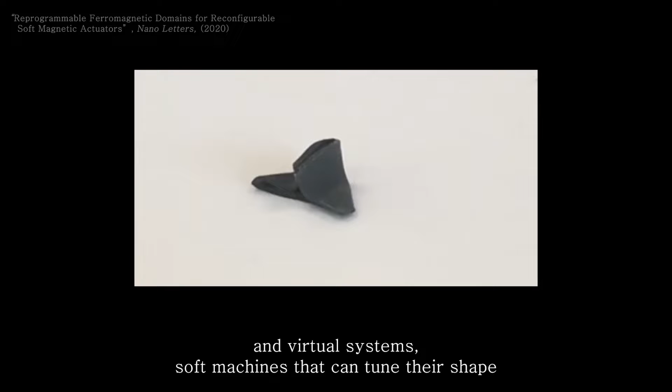Inspired by these remarkable adaptive features exhibited by biological and virtual systems, soft machines that can tune their shape and mechanical properties have shown great potential in applications involving unstructured and continuously changing environments. However, current soft machines are far from achieving the same level of adaptability as their biological or virtual counterparts, hampered by limited real-time programmability and severely deficient reprogrammable space of properties and functionalities.

To address this challenge, here we introduce a pixelated in situ programmable mechanical metamaterial, PPMM, that leverages graphical stiffness patterns to program and reprogram an unprecedented level of versatile mechanical capabilities without requiring additional infrastructure.

Inspired by binary language systems, where simple coding of discrete binary digits with assigned coding sequences enables effective and comprehensible representations of a variety of information, we harness stiffness tunable pixels that can be in situ encoded as 0 and 1, where 0 represents the pixel in a stiff, deactivated state, and 1 represents the pixel in a soft, activated state.

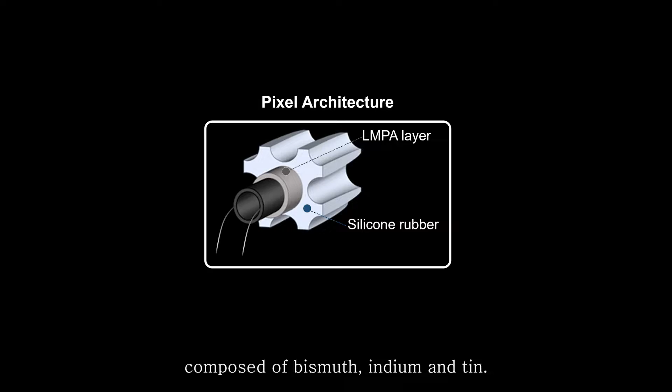To achieve this, we employ a synergistic approach that combines the elastic instability of an elastomer with a periodic array of circular voids and the phase change of embedded low melting point alloy, LMPA. The LMPA we used, known as Field's metal, is a eutectic alloy composed of bismuth, indium, and tin. This alloy remains in a solid state at room temperature, but undergoes a phase transition into a liquid state at a low temperature of 61 degrees Celsius.

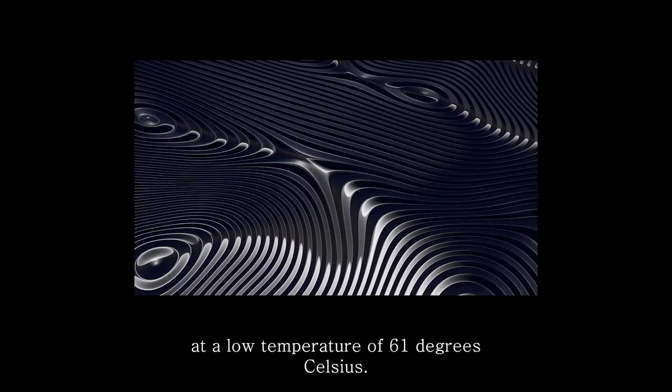This unique property empowers each pixel of the PPMM to achieve dramatic changes in stiffness with low energy consumption. Finally, we integrate soft heaters into each pixel to enable real-time active control of the LMPA and ensure reversibility.

Through uploading digitized stiffness pattern information by independently switching the digital binary stiffness states of individual pixels, a PPMM featuring a grid of 7 by 7 pixels can project an extensive range of 2 to the power of 49 possible mechanical information. This abundance of mechanical information encompasses a wide spectrum of mechanical attributes, including shape-shifting, shape memory, stress-strain response, and Poisson's ratio, as well as application-oriented functionalities such as tunable and reusable energy absorption and pressure delivery, all of which can be quantitatively adjusted as needed.

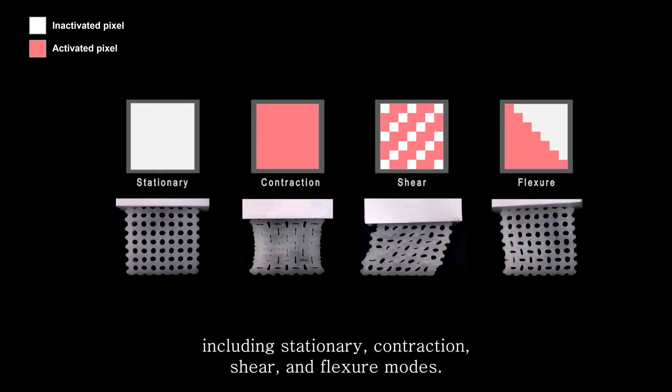For instance, when the PPMM is put under compressive strain, encoding a digital pattern can lead to a distinctive shape-shifting response characterized by tunable continuous curves on both sides of the PPMM. By rationally encoding the digital pattern, we found numerous sets of shape-shifting modes of the PPMM that can be expressed, including stationary, contraction, shear, and flexure modes. Furthermore, their degree of shape-shifting can be further quantitatively tuned by making coherent pattern adjustments.

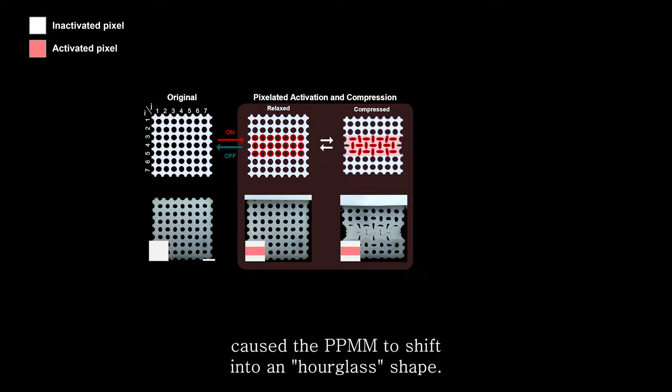Also, these various attainable shapes can be memorized and retained without requiring continuous energy through time-dependent coding with rationally sequenced digital patterns. For instance, activating the mechanical pixels in the middle 3 horizontal rows and applying compression caused the PPMM to shift into an hourglass shape. Deactivating the pixels while maintaining compression memorized the deformed shape, which the PPMM held without requiring external load or energy. Subsequently, reheating the deactivated pixels restored the PPMM to its original shape from the shape memorized state.

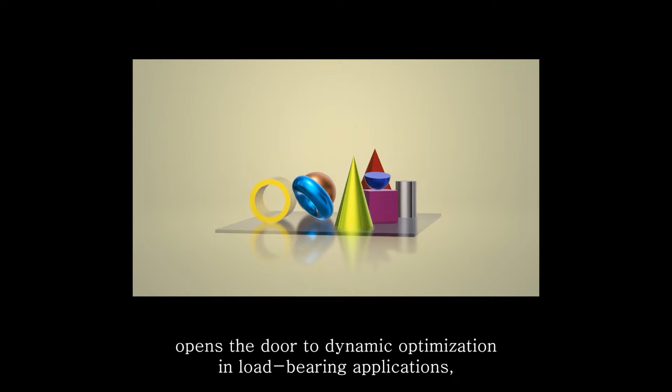The remarkable aspect of the pixelated approach lies in its ability to selectively target the regions for shape memorization. The PPMM has the ability to deform and memorize its entire structure. Alternatively, it can be selectively activated and then fully memorized. Furthermore, it can be selectively activated and then selectively memorized. This versatility of the PPMM opens the door to dynamic optimization in load-bearing applications, since the PPMM can adaptably memorize an effective shape depending on the specific shape of the load it will support.

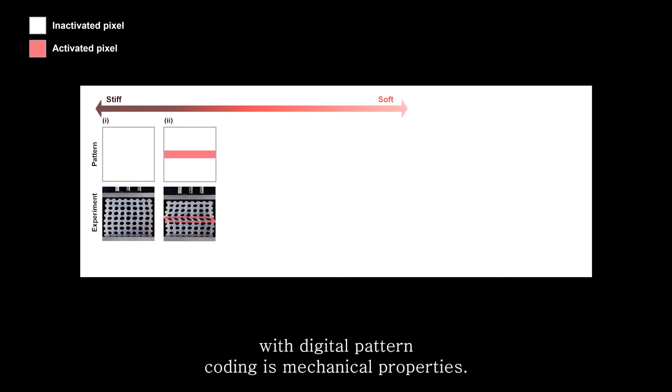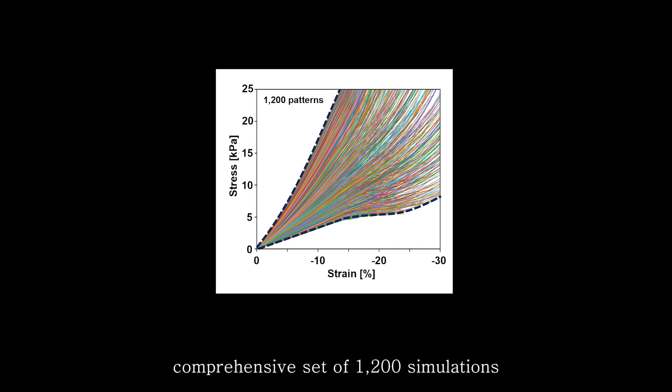Another quality that can be quantitatively tuned with digital pattern coding is mechanical properties. Since each pixel in a stiff state contributes to a portion of the overall strength of the PPMM, the stress-strain curves can be adjusted in correlation with the portion of the activated pixels. We performed a comprehensive set of 1,200 simulations, with each simulation featuring a unique pattern. As a result, the PPMM showed a remarkable fine tunability, with the effective Young's modulus being inversely correlated with the activated pixel density.

As another mechanical property of the PPMM, we explored the effect of pixelated activation on Poisson's ratio, which is defined here as the ratio of the transverse strain to the longitudinal strain. In order to achieve quantitative tunability in Poisson's ratio, we first rationally derived two elemental patterns that produce the two opposing negative and positive values of Poisson's ratio. By combining these patterns column-wise, each unique mechanism was preserved, allowing for local variations in Poisson's ratio that could be summed or cancelled to produce the overall Poisson's ratio response.

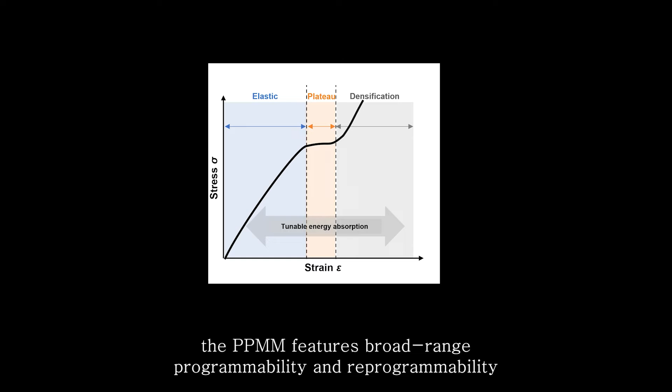As one of the possible applications, we demonstrate the PPMM as a tunable and reusable energy absorption material for an extensive range of possible impact scenarios. In contrast to most existing energy absorption materials that have fixed mechanical properties and attenuate impact through irreversible crushing or plastic deformation, the PPMM features broad-range programmability and reprogrammability, as well as recoverability driven by the phase transition mechanism.

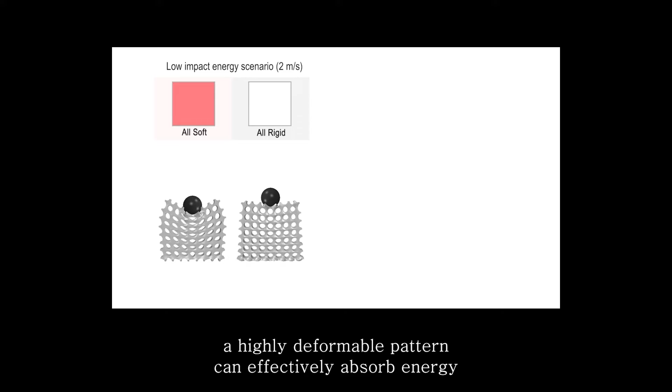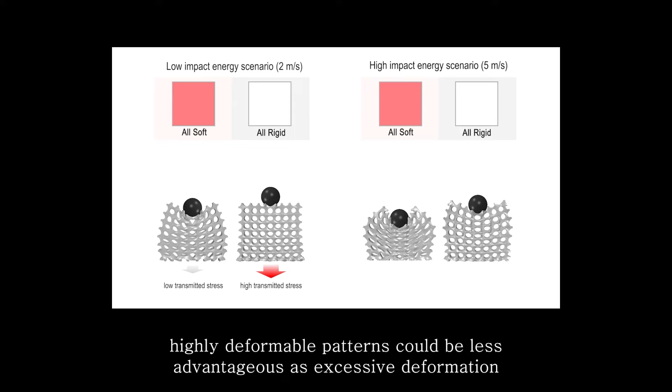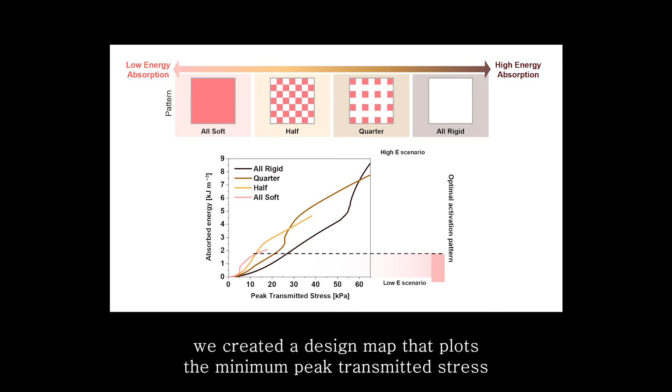For example, in a low-impact energy scenario, a highly deformable pattern can effectively absorb energy and avoid the creation of internal stress that can elevate the transmitted stress. However, in higher impact energy scenarios, highly deformable patterns could be less advantageous as excessive deformation can lead to the densification of the structure. For general guidance of the activation pattern, we created a design map that plots the minimum peak transmitted stress for various patterns across a range of impact energies. This illustrates the PPMM's versatility in adapting to different conditions.

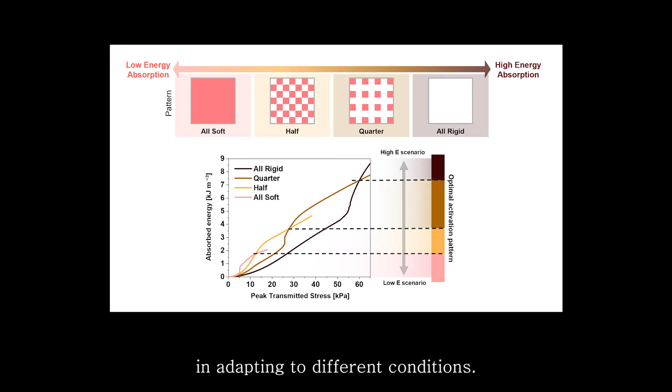As another possible application, we exploit the PPMM as an adaptive pressure delivery material that can control the path of stress flows through their mechanical pixels. In detail, when one side of the PPMM is pressed, the pressure can be selectively transferred to specific locations on the other side, depending on the digital patterns.

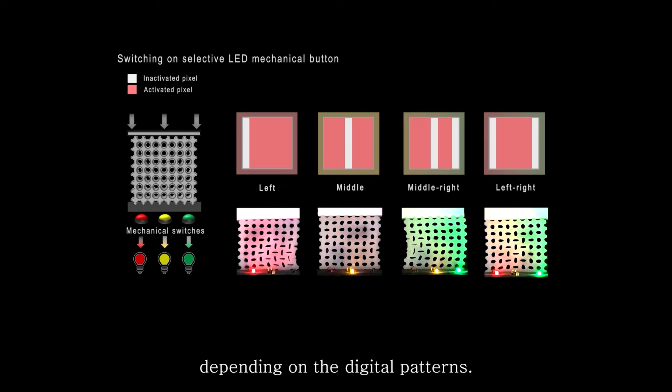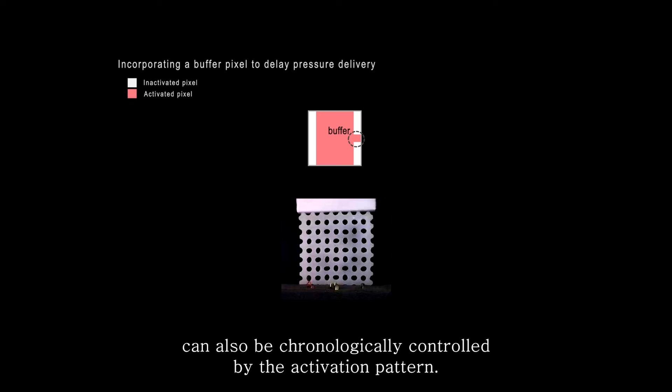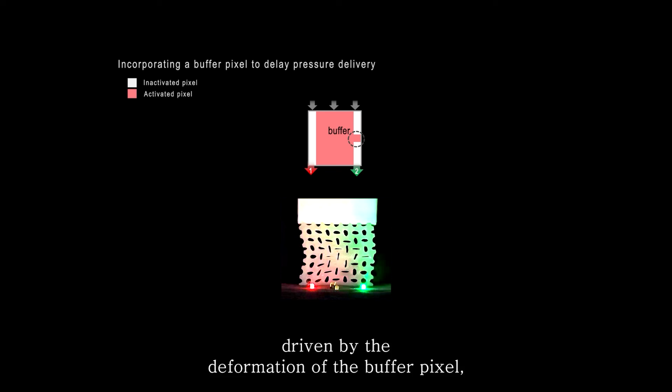Lastly, we demonstrate that the pressure delivery can also be chronologically controlled by the activation pattern. The inclusion of a buffer pixel delayed the transmission of the pressure driven by the deformation of the buffer pixel, resulting in sequential pressure delivery and subsequent operation of the LEDs.